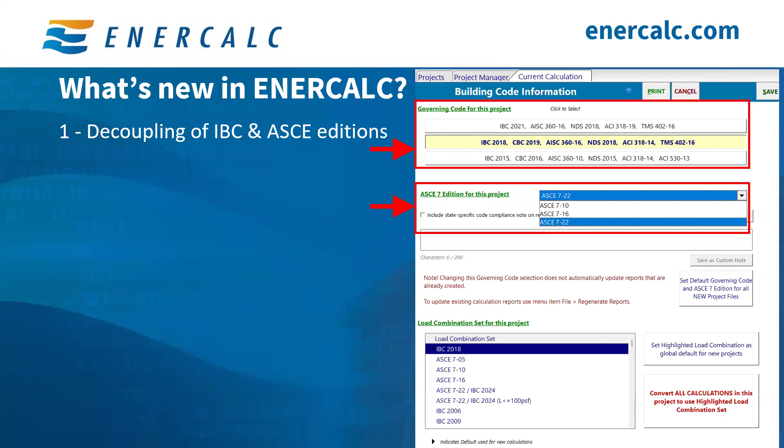The second update is the addition of new ASCE 7-22 modules. Previously, all projects came preloaded with the various loads and forces modules for ASCE 7-16.

And now these loads and force modules behave similarly to all of our other modules in that they can be added, copied, deleted from any project. So you may have noticed the add module window now has 3 additional new tabs.

First tab is the seismic loads tab, where we added calcs for seismic base shear, seismic wall anchorage, and seismic demands on non-structural components. Next tab is the wind loads tab, where we have calc modules for ASCE 7-22 wind forces per chapter 27 and chapter 28, as well as ASCE 7-22 wind enclosure determination. The module for components and cladding per chapter 30 is in active development, and that will live here once it's

been released. And the last tab is the other loads tab, where we have added a calc module for ASCE 7-22 live load reduction. Any additional calculation modules for this tab, such as snow loads, will live here once they've been released.

So another relatively new feature is load linking natively within ENERCALC. So load linking gives you the ability to automatically link reactions from one calc to another, and the ability for you to change something in one member and then have those effects of that change trickle down to all of the supporting members. So this is one of our most requested features from users, and we're excited to say that load linking is available currently in steel beams and ready for you all to use.

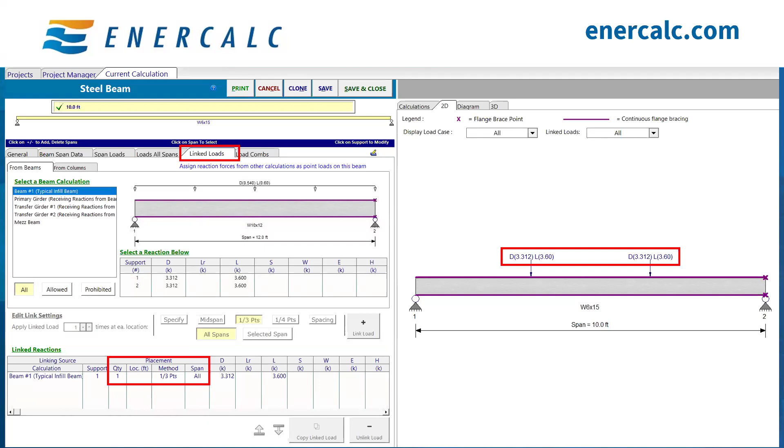And once I'm happy with my selection, I can click the add button and I'll see the linked reactions in the table below. All of the linked reactions for the current calc will appear in that table. So for example, we can see the placement is at 1/3 points, and you can see clearly here in the 2D sketch that the reactions are applied at third points.

Now, if we look at the corresponding changes in the project manager, if you're in the latest build, you'll see a new tab at the top called Calc Order. So this tab just organizes all of your calcs based on the load path order.

So you can see beam number 1 here is listed first, and then the primary girder, which receives reactions from beam number 1, then the transfer girder number 1, which receives reactions from the primary girder, and finally the transfer girder number 2, which receives reactions from transfer girder number 1. You can link multiple reactions from multiple members at the same time, and ENERCALC will understand the load path logic and ensure that all calcs are performed in the proper order.

So for example, if we were to update the loads in beam number 1, we would see the linked load status badges for all of the downstream calculations turn orange and red, indicating to us that a recalc for those members is needed.

And then you'll also notice a new button on the top labeled Recalculate Linked Loads. If you don't want to go through each calc one by one to observe the changes caused by those updated reactions, this button just allows you to bulk recalculate all of the calcs to ensure that the most up-to-date reactions are being used and their effects are trickling down to all the related members downstream.

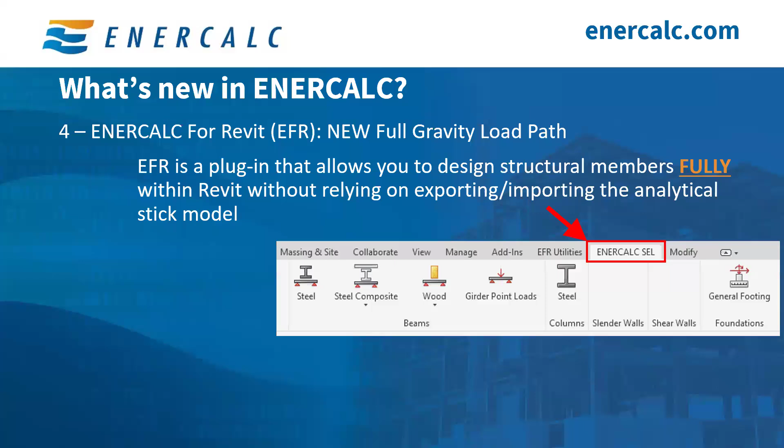And then the final new feature I want to highlight today is our ENERCALC for Revit full gravity load path. So if you attended November's office hours session, Seth took us through ENERCALC for Revit, which is a Revit plugin that allows you to leverage ENERCALC to design structural members fully within Revit without the need to export a stick model or export info to some other calculation software.

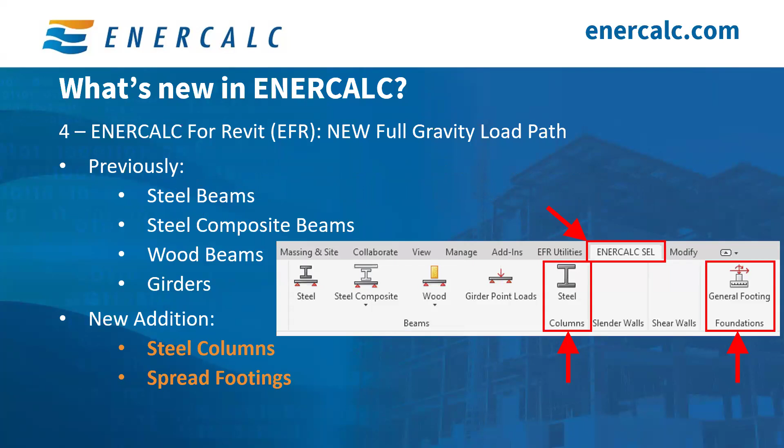And we previously supported steel beams, steel composite beams, and wood beams. And now steel columns and general spread footings have been added as well, which completes the full gravity load path for steel structures. So let's take a look at this in action. So here we have our Revit model, and we can navigate to the ENERCALC SEL tab in the ribbon bar and select steel column design.

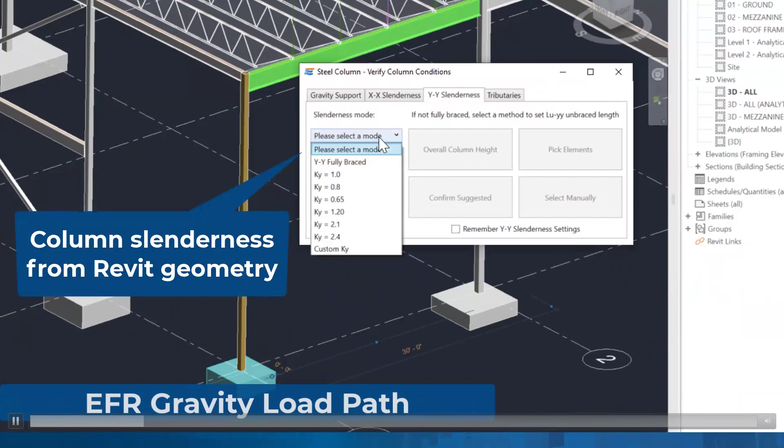You can then pick the steel column you want to design, confirm the gravity support conditions. We can specify the slenderness inputs in both the X and Y directions by either selecting the full column height or by directly picking the bracing elements from the Revit model. We can then confirm our tributary loads from the adjacent framing elements. And once we click OK, the program will open an ENERCALC calculation with all the info from Revit pre-populated.

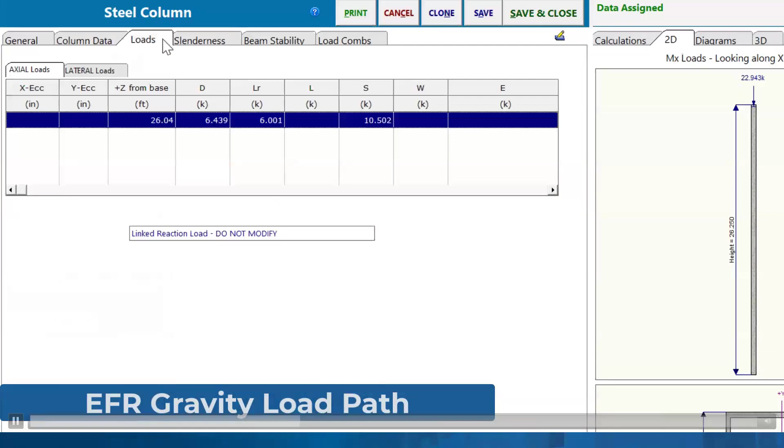So I can give the column a name here. And then we can see the column size was brought in from Revit, and the applied loads, which are based on the reactions from the tributary elements framing into the column, are brought in as well. Once we click Save and Close, we'll be taken back to Revit, and the column size will be automatically adjusted to match our calculation. So we'll see that here.

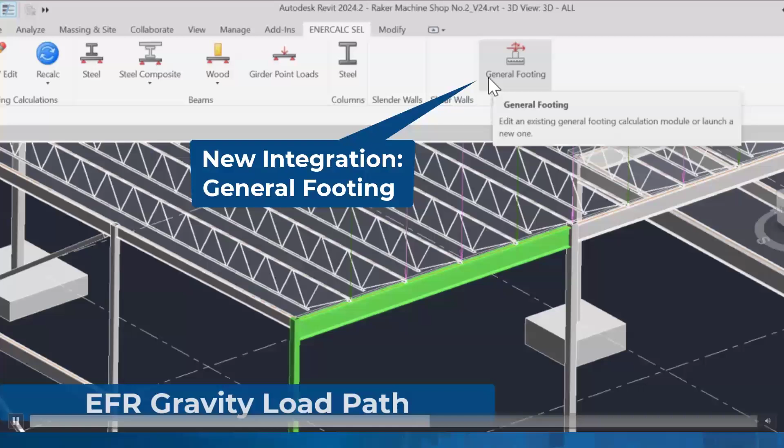We can also use the same point and click logic for the foundation as well. So we select our footing and confirm the tributary column. We can then give our footing a name and update the material properties and soil properties. We can see the reactions from the tributary column are automatically populated, and we can also adjust the footing geometry and reinforcement in the ENERCALC calculation.

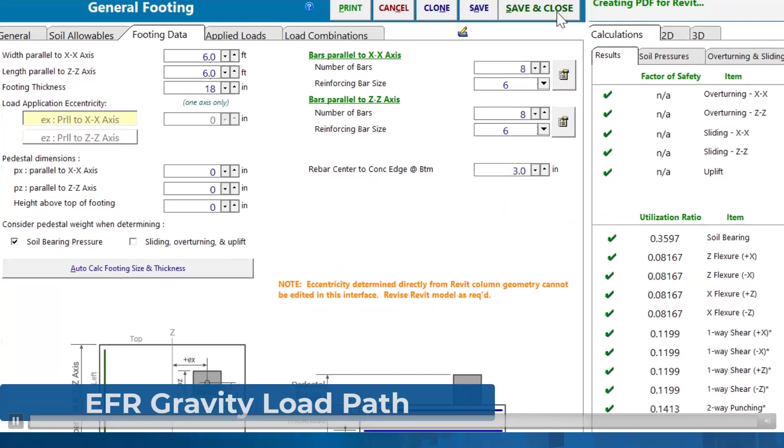And once we click Save and Close, those calculations will be carried over to Revit. So the Revit model will automatically update based on those changes, and the reinforcement info will be added as a property, which we can then use to tag in our construction drawings and schedules.

So if you have an active ENERCALC for Revit subscription, you can update to the latest EFR build by going to the for users page and downloading the latest build, just like you would for ENERCALC SEL.

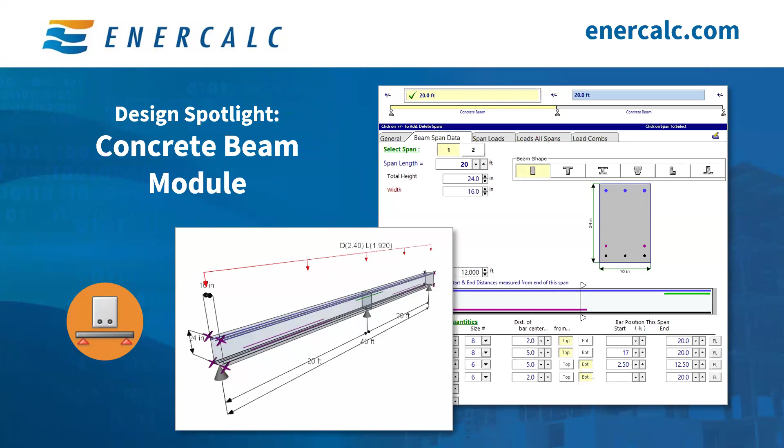So that covers today's What's New portion of the session, and it's time to move on to the design spotlight. The focus of our session today is the design of concrete beams using the concrete beam module in ENERCALC. So we'll cover the module's capabilities and limitations, walk through an example together, and then we'll jump over to the live Q&A.

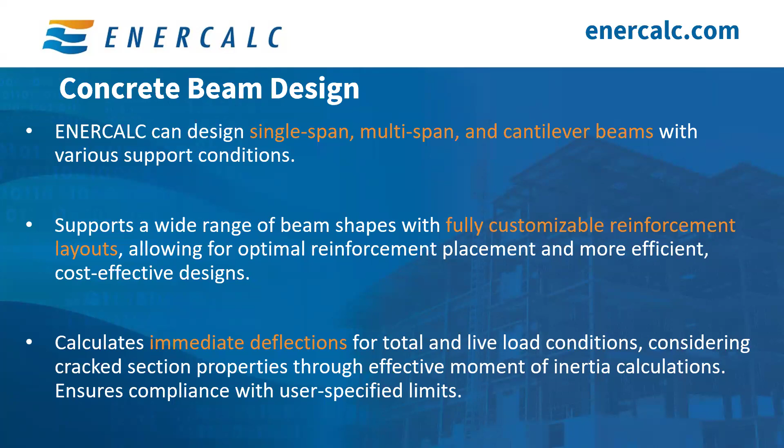The concrete beam module can handle a variety of beam configurations, whether it's single span, multi-span, cantilever beams, and it also has the flexibility to accommodate various support conditions. It also supports a wide range of beam shapes and offers fully customizable reinforcement layouts. It can also calculate immediate deflections for both total and transient load conditions while considering cracked section properties through effective moment of inertia calculations. So for today's example, we've been tasked with designing a 2-span concrete floor beam designed per IBC 2021 and ACI 318-19 in seismic design category C.

Both spans are 20 feet and the trib width is 20 foot as well. The beam is supporting an 8-inch slab, and for the sake of keeping things simple, I'm not going to assume an effective slab width here. I'm just going to assume a simple rectangular beam, not a T-shaped beam.

So the 8-inch slab comes out to 100 PSF of applied uniform dead load. And we'll assume there's another 10 PSF of superimposed dead load for finishes, MEP, etc. The beam is supporting a typical office occupancy with interior partitions. So we end up with 110 PSF of dead load and 65 PSF of live load.

So let's jump into our ENERCALC program and start a new concrete beam calc by clicking Add, navigating to the Beams tab, and selecting the concrete beam module. I always recommend starting with our inputs in the General tab and then working your way through the inputs, moving left to right as we set up our calculation. So here on the General tab, you can give your calc a unique name, and you can see I've named this one B1 Continuous Concrete Beam.

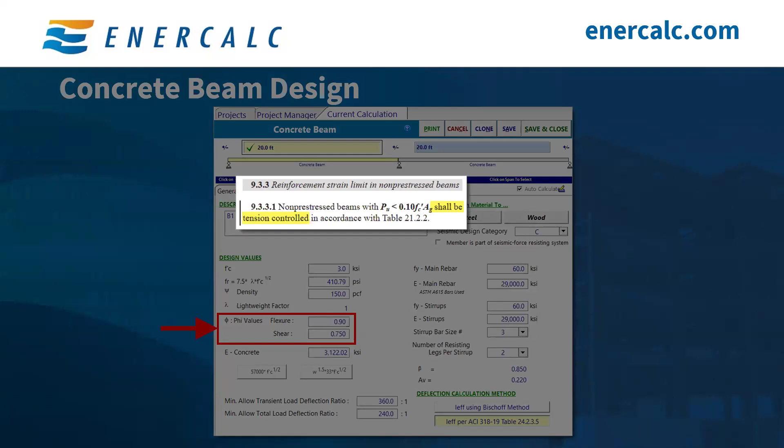So if we jump back to our example, we can define the phi factors used for both flexure and shear design. By default, ENERCALC assigns a value of 0.9 for flexure. This aligns with section 9.3.3.1, which specifies that non-prestressed beams must be tension controlled as outlined in table 21.2.2. The tension control requirement just ensures sufficient ductility for which warning of failure by excessive deflection and cracking can be expected. And according to table 21.2.2, a tension controlled beam receives a phi value of 0.9.

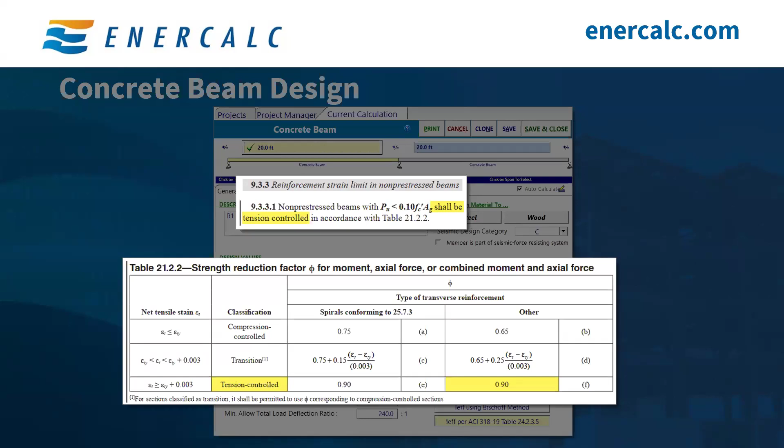If the beam is over reinforced and does not meet the criteria for being tension controlled, a warning message will be displayed to alert you so that you can avoid some brittle failures.

For the concrete modulus of elasticity, the user can either manually input their value or they can use one of these buttons here provided to calculate the modulus based on the f'c input above. Note that if you change the f'c value, you'll notice that the modulus does not automatically update. So you must either manually input the corresponding modulus or reselect one of the buttons to have the program recalculate the new Ec value based on the updated f'c value.

I'm going to use the far left button here to determine my modulus of 3,122 KSI for our 3 KSI concrete.

And here we can specify the minimum deflection ratios for both transient loads and total loads, as well as the deflection calculation method. Note that only immediate deflections are calculated in the concrete beam module, so all time-dependent deflections must be evaluated separately.

And if I jump back up to the top here, I've specified a seismic design category of C and unchecked the box, which indicates that this beam is not part of the seismic force resisting system. And a couple things I want to note here as well.

Concrete beams falling within seismic design categories D, E, and F are beyond the scope of this module. Beams in those seismic design categories are subject to additional design requirements outlined in the ACI, sections 18.6 for SFRS beams and section 18.14 for non-SFRS beams. And for those cases, ENERCALC will suppress the results since the program is unable to ensure compliance with the ACI code requirements.

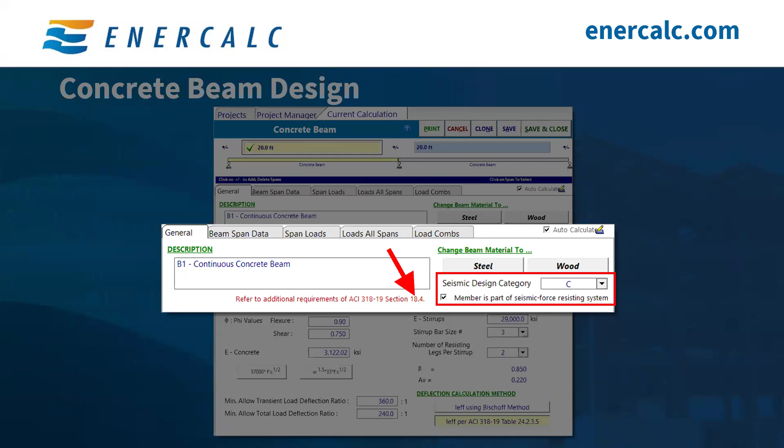So if we jump back to our example, since our beam is in seismic design category C and not part of the seismic force resisting system, we can proceed and move on to the beam span data tab. So at the top of this window, you'll notice where we can specify the beam dimensions. And this is where we can select which span the data entry values are applying to. Additionally, we can define some critical dimensions like span length, beam height, and beam width.

I've entered the span length of 20 feet here from our example problem. And in practice, you typically start with an assumed size, you check the design, and then adjust the dimensions iteratively until you find a solution that you're happy with. So to save time here, I've already gone through that process and settled on a beam size of 24 inches tall by 16 inches wide.

This module can also handle a variety of beam shapes as shown here. So for simplicity, like I said earlier, I'm just going to be sticking with the standard rectangular section for this example, but you can always pick from any of these shapes for yours. Whatever section you do choose will remain consistent across all of the spans.

The beam section that's displayed here is a single cross-section cut at a specific location along the beam, and you can adjust the section cut location if you want to preview the reinforcement layout at different points along the beam. So for example, at 0 feet from the left end, we can see this cross-section with bar sets number 1 and number 4. That is the blue and black bars there. And if I update the section cut to 12 feet, for example, the section cut indicator updates, and now we see a new cross section with bar sets number 1, 3, and 4. So that's the blue, purple, and black bars there.

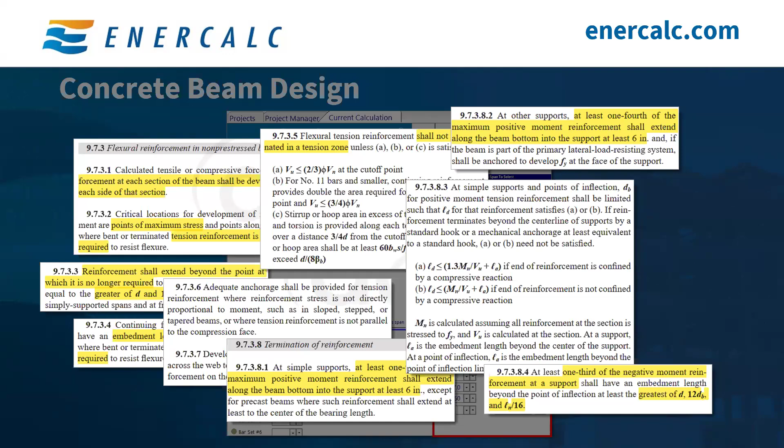I also want to make a quick note about rebar development. So the ACI includes detailed requirements for rebar development lengths in section 9.7.3. And as you can see here, there's quite a few of them. Within this module, bars are always assumed to be fully effective at the points where they're defined. So what this means is that the rebar sets are assumed to be fully developed at the defined start and end locations.

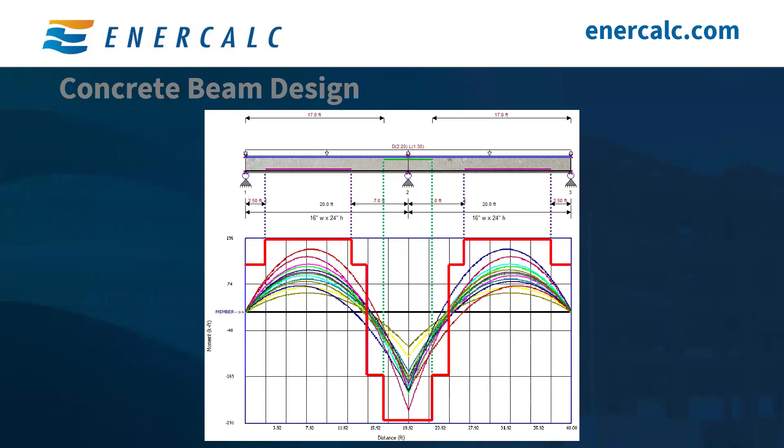So it's essential to understand that behavior and make sure that you are accounting for any additional development lengths on your construction drawings to ensure that the bars are fully developed at the locations where you need them to be. Just remember, this module is an analysis tool, not a detailing tool. Fortunately, the ACI commentary offers some pretty helpful diagrams to help guide you through these checks.

So if we jump back to our design example, as I mentioned earlier, designing reinforcement in practice usually involves an iterative process, adjusting and tweaking the layout until you've reached a solution that you're happy with. I've already completed that process ahead of time, and I've settled on the rebar layout shown here. And since our beam configuration is symmetrical and the loading is uniform, I've gone ahead and mirrored the rebar layout for the second span as well.

Next, we can move on to applying the beam loads. The span loads tab is where we define the loads acting on our beam. These are applied on a span by span basis, meaning each span of the beam can have its own unique set of loads. This tab probably looks pretty familiar.

It's identical to the span loads tab in all of our other beam modules, which Mac has already covered in detail in previous office hours. Since the beam in our example has only uniform loading across all spans, I won't actually be using this tab directly for our example, but I will give you a quick overview of its features.

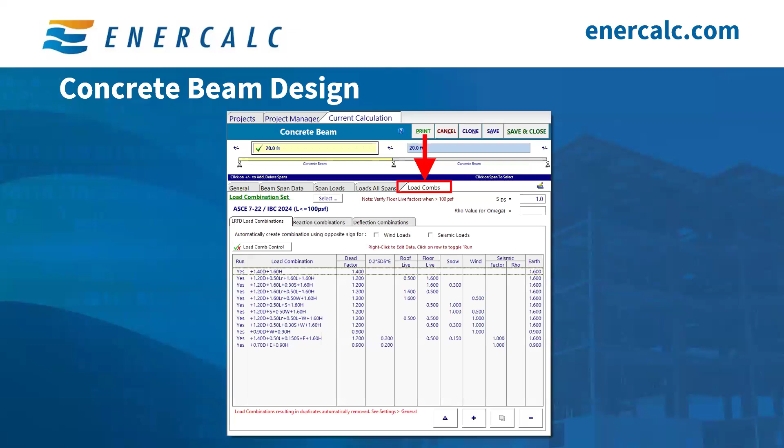And finally, we can take a look at the load combs tab. This is where we define the load combinations that we use for strength, reactions, and deflections in the calculation. Since this tab is virtually identical across all ENERCALC modules, and Mac has already covered it in detail during our previous office hours, I'm not going to spend time going over it here.

But just keep in mind that this is your go-to tab for anything related to load combinations. And now that we've fully defined our beam's properties, the dimensions, loading, and reinforcement, we can review the results.

The calculation tab provides several result options, and there's a lot of interesting results on all the subtabs contained within, but I'm just going to dive into a few of them in more detail here. Starting with the summary results tab, this is probably the results tab you'll be looking at most often, as this provides the governing results for bending and deflection. And while shear results aren't shown here, they are summarized on a separate tab, which includes the required stirrup layout to meet shear demands. But we'll be talking about that a little bit more later.

At this stage, you typically review these values and confirm that your design works. And if not, you'd go back and adjust your section dimensions and reinforcement layout until you have a design that satisfies your requirements. In our example, I've already done that work of iterating through different section dimensions and layouts, so the layout I showed earlier achieves a 91% demand capacity ratio, which I am happy with.

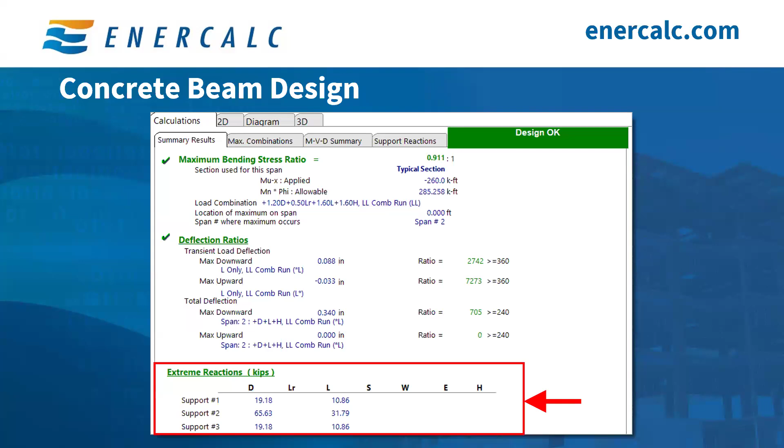And if we jump over to the MVD summary tab and then the LRFD shears and moments sub-tab, we can see a more detailed breakdown of these results, including moment data for each station along the beam for each load combination.

All right, it sounds like my audio may have cut out. Can you guys hear me? We can hear you now, Derek. Yeah, we got you now. Okay, not sure what that's about. I'm gonna start that over.

So if we jump over to the MVD summary tab and then the LRFD shears and moments sub-tab, we can see a more detailed breakdown of the results, including the moment data for each station along the beam. So for multi-span beams with automatic unbalanced live load placement enabled, like I've done in this example, this can generate thousands of lines of results based on all of those loading permutations. So just keep that in mind.

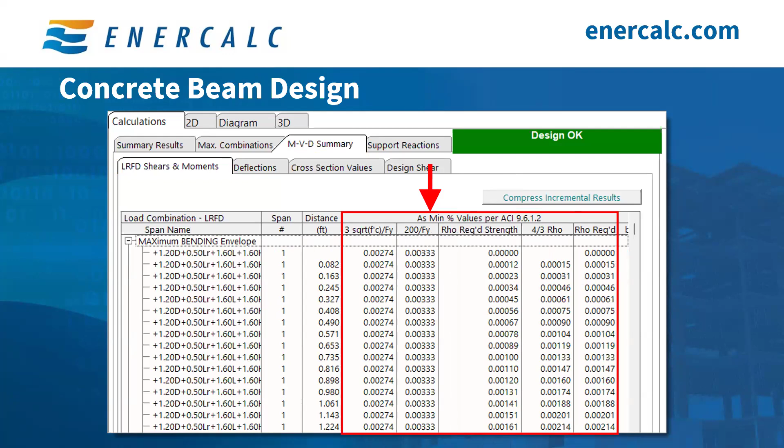And in addition to these detailed strength results, this tab also includes intermediate calculations for minimum steel reinforcement. This is per ACI sections 9.6.1.2 and 9.6.1.3.

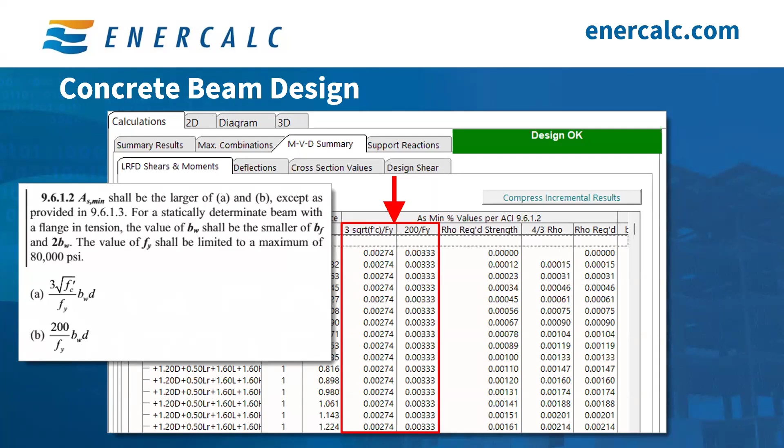And here we evaluate the equations A and B from section 9.6.1.2, which states that AS min must be greater than 3 root F prime C over Fy, and AS min must also exceed 200 over Fy. We can then calculate the reinforcement ratio to meet the flexural strength, which allows us then to check 9.6.1.3, which says AS min from 9.6.1.2 does not need to exceed 4/3 of the AS required for strength. And then from those checks, we can determine the governing rho min and the associated AS min value.

This tab also performs a check for AS max, which is the maximum allowable flexural reinforcement while maintaining tension-controlled behavior. As discussed earlier, section 9.3.3.1 and table 21.2.2 require that concrete beams be designed to remain tension-controlled.

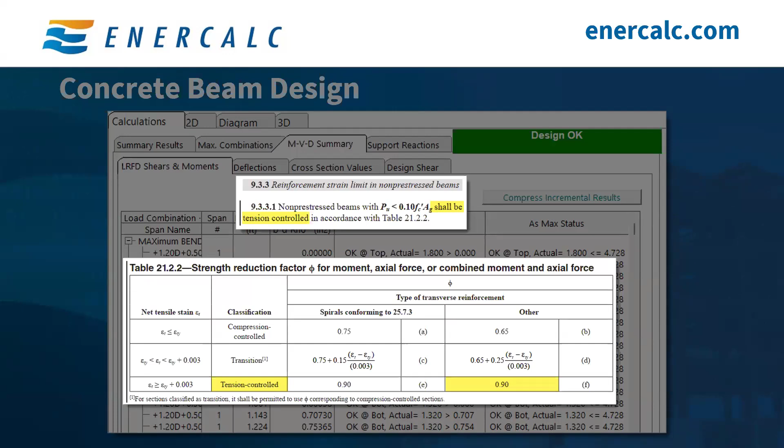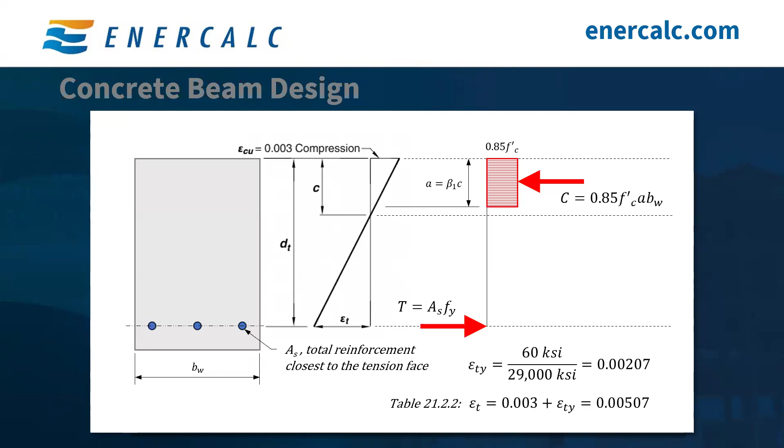Table 21.2.2 also specifies that the net tensile strain for grade 60 reinforcement must be at least 0.00507 to qualify as tension controlled.

Using similar triangles from the strain diagram, we can relate the neutral axis depth C to the depth of extreme tensile reinforcement dt. By summing the forces in the x direction and substituting our earlier equations, we can derive the following formula for AS max.

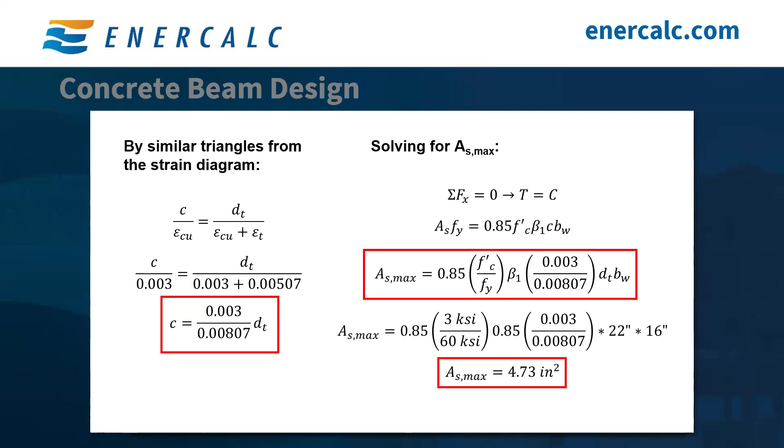For our example beam, plugging in the relevant values yields an AS max of 4.73 inches squared. As shown here, this aligns perfectly with the module's results, confirming that our beam is tension controlled as required by the ACI.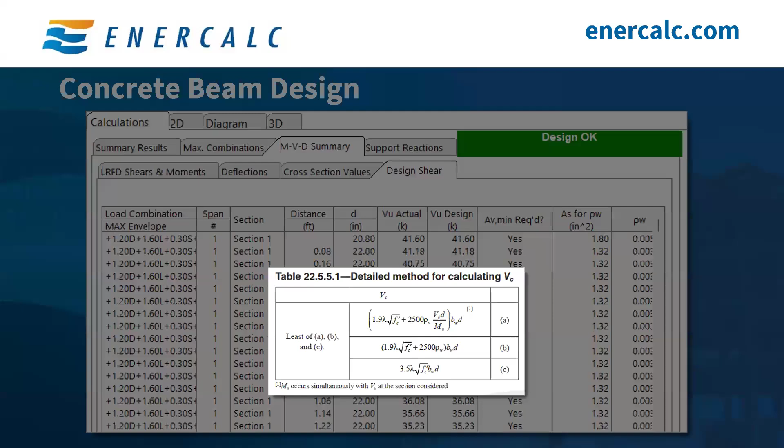Next, let's talk a little bit about shear design. The concrete beam module evaluates the beam's shear demands and reports optimal stirrup spacing for incremental stations along the length of the beam. Under ACI 318-14, the process was pretty straightforward.

We could just calculate the concrete shear capacity V sub C for this section, then determine the required shear capacity due to transverse reinforcement V sub S, and then solve for the corresponding stirrup spacing S.

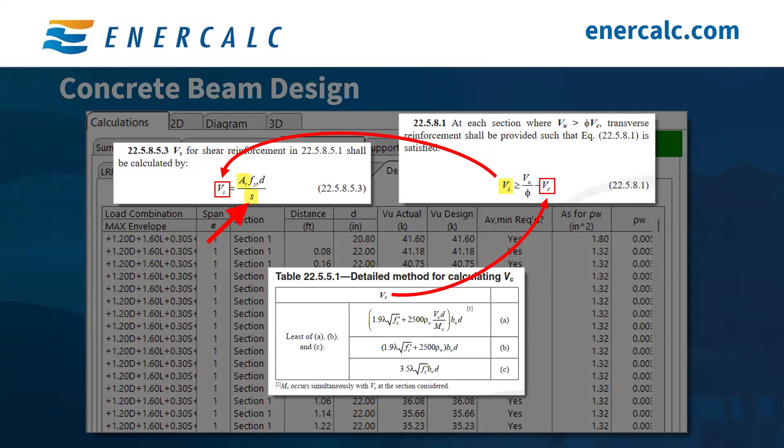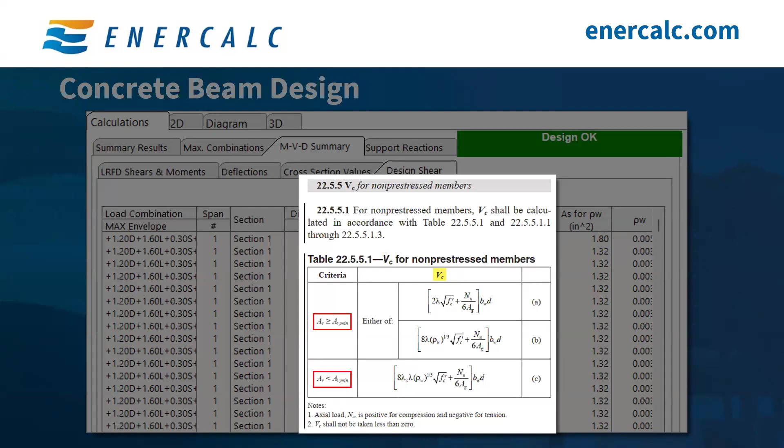However, under ACI 318-19, the process isn't quite so straightforward. For us to calculate the concrete shear capacity V sub C, it's necessary to know the relationship between the provided AV and AV min beforehand, where AV min is calculated per 9.6.3.4. The thing is, we don't know what the actual stirrup design is until after we calculate VC, so this creates a circular dependency in the design logic.

To further complicate things, if you were doing this by hand, you might initially assume that AV is less than AV min and proceed with equation C, only to find that after applying stirrup spacing limitations, your AV provided now exceeds AV min, which then forces you to recalculate VC using equations A and B.

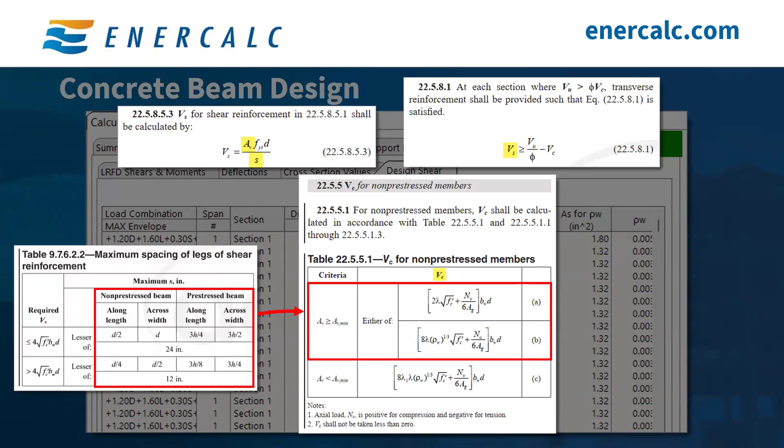You can see how this process would be pretty tedious to do by hand, but luckily we have ENERCALC to help us out here. To handle this, the concrete beam module evaluates both scenarios simultaneously. It calculates an optimal stirrup spacing based on V sub C calculated using equations A and B, and then it calculates a separate optimal spacing based on V sub C calculated using equation C. It then returns the more favorable stirrup design as a suggested spacing.

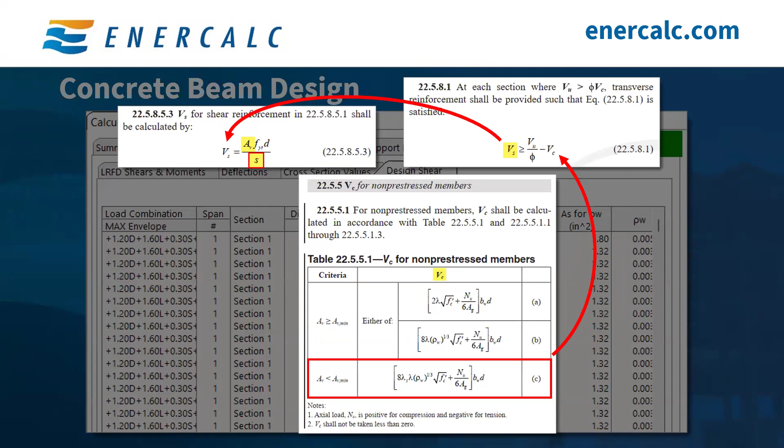To better illustrate this process, here's a flow chart that goes into the shear design logic in more detail. I'm not going to go into every detail, but you can see how it first evaluates the concrete shear capacities using all equations from chapter 22.

It then traverses two logical branches simultaneously, and applies the various stirrup spacing limits in both branches. It then selects the more favorable stirrup design and proceeds to calculate phi V sub n and the shear stress ratio.

This flowchart is included in the user manual, and it will also be part of the summary provided after today's office hours, just for your future reference.

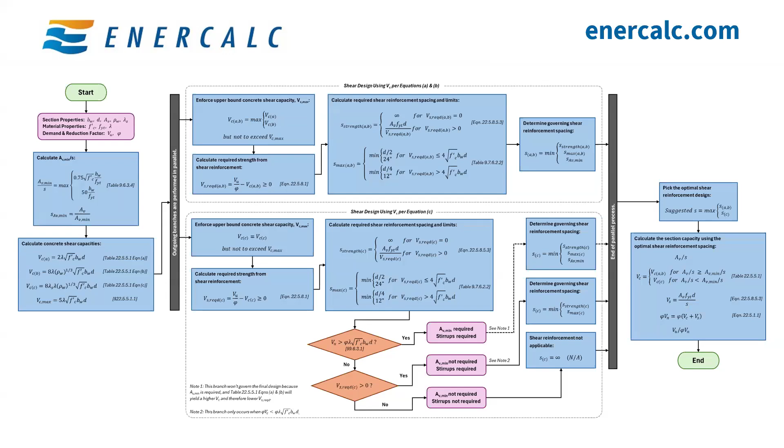If we take a look at the design shear tab, we can see these intermediate calculations providing a clear breakdown of the entire design process.

We can scroll to the right to see that tie spacings for both design branches are calculated, along with the final suggested spacing, which is the greater of the two. Finally, the total shear capacity is computed using the suggested spacing, and the associated shear stress ratio is reported.

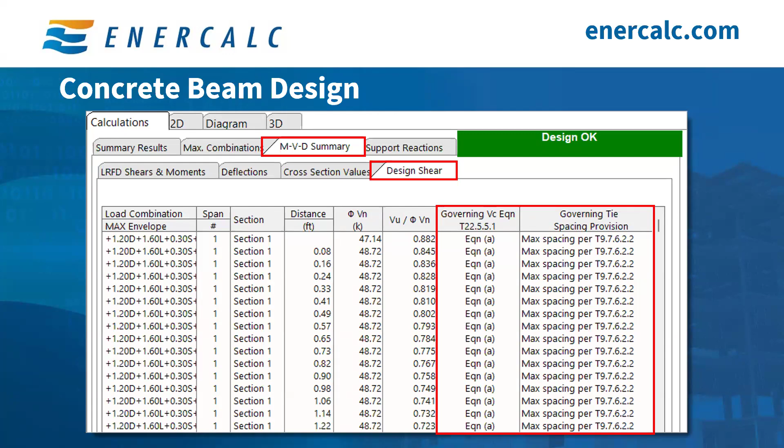Some additional notes are also included to indicate which provisions are governing the design. And wrapping up today's design spotlight on the concrete beam module, let's take a final look at the sketches and diagrams.

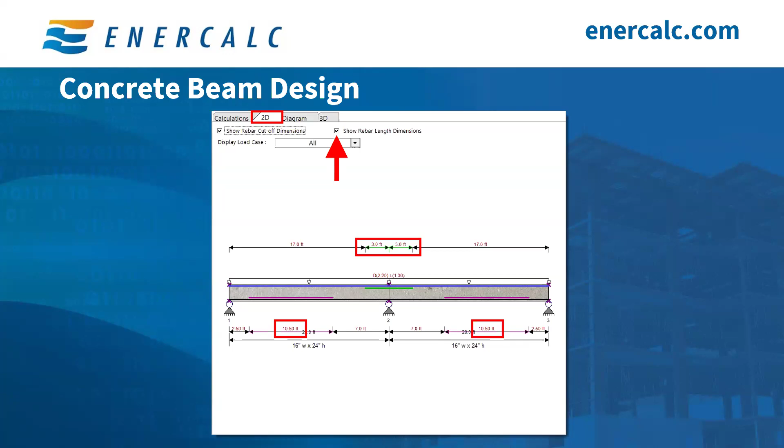Starting with the 2D sketch tab, this just provides a graphic representation of the beam with reinforcement layouts and extents, span lengths, and cross-sectional dimensions. You also have the option to show rebar length dimensions to display the lengths of the defined rebar in elevation. As I mentioned earlier, it's important to remember to include any additional development lengths when documenting this info on your construction drawings.

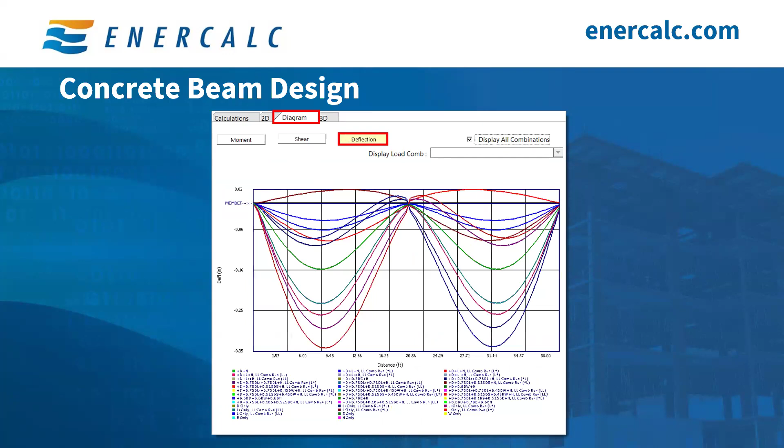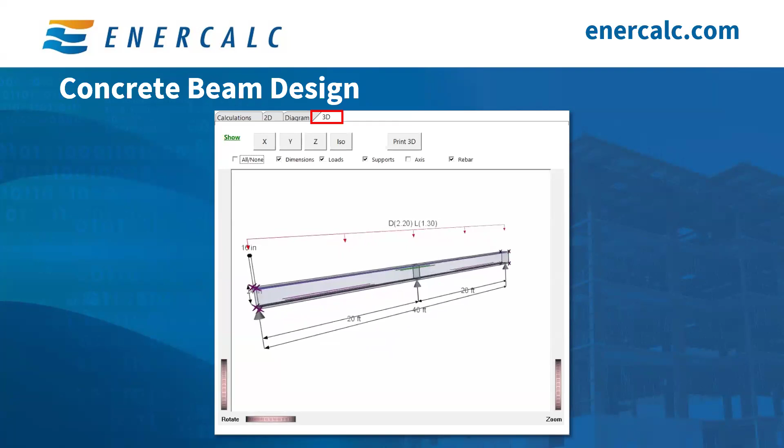And that wraps up today's design spotlight on the concrete beam module.